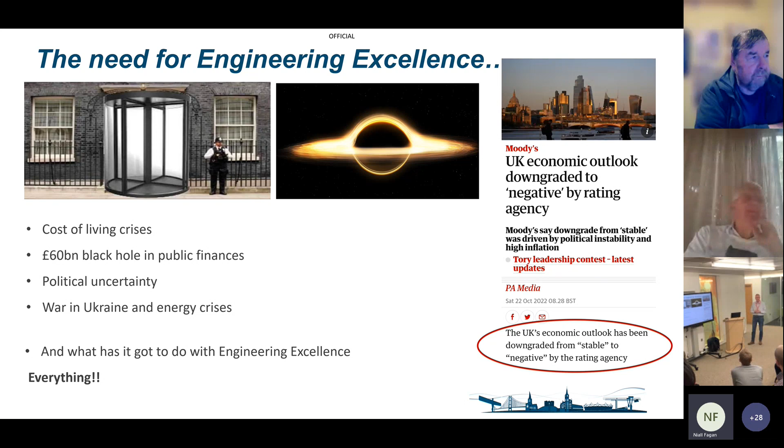So what has that got to do with engineering? Well, I actually think it's got everything to do with engineering. So what can engineers do? For those of you who like Dilbert, I think Rich probably can't see it there, but basically it says that managers are supposed to be dumb and engineers are supposed to be smart. In a nutshell.

So I think what we're here to do is to question, to challenge, to understand, to reason, to produce. As engineers, that's what we should be doing. We should be using engineering principles to challenge practices and engineering standards. And I've got at the end, can you make a career out of following process? Well, unfortunately, yes, because I think we've bred a generation of engineers who tick the box and follow the process. And it's not their fault, because that's how we've beaten it into them over the last 10, 20 years - follow the standard, follow the process. I think whilst we need processes and clearly we need standards, I think how we interact with them should change.

So what I'll cover this evening - I'm going to do a bit about HS2's approach to specification and design. And the key word is approach here.

Potential failure mechanisms of track, because I think that's really important. When you're comparing high-speed rail to conventional rail, failure mechanisms occur, and a lot of them are very similar, if not the same. How we challenge and improve, learning from good practice but also bad practice, failures. That's really important, and that's one of the things I put into practice in High-Speed 2.

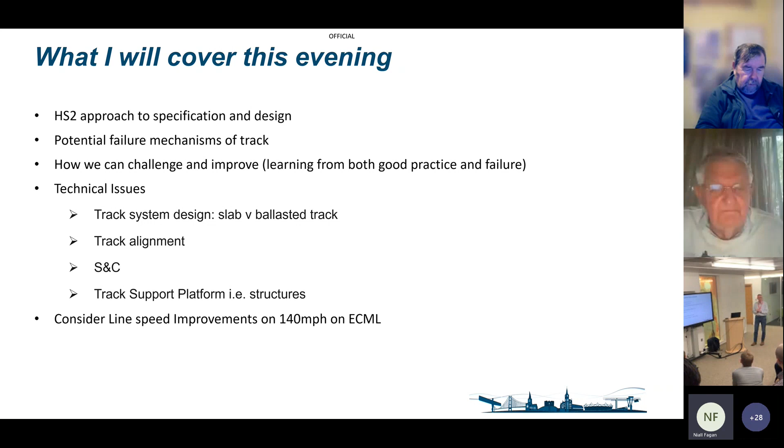Systems design covers rolling stock, track, and support platform. So I'll cover S&C briefly and the track support platform. And I've just added at the end, even though this is my experience in high speed, I got involved in a few workshops recently about 140-mile-an-hour running, potentially on the East Coast Main Line. So this is very relevant, and this may come to somewhere near you soon.

So client-led specification and design. I'm a believer that as a client organization, we've got to lead, okay? And what I mean by that is we've got to take ownership. I think it's really important. Now, I've seen, again, when I was with HS2, we were speaking to a lot of other infrastructure managers.

In Sweden, for example, I got talking to the guys who were in the development stage, and I said, so how are you choosing your track form? They said, we're going to let the contractor decide. Okay, right. And everything was, oh, well, we'll just put it in the contract, the contractor will decide. I personally don't agree with that, because contractors price risk. One of the first things I learned as an engineer, contractors price risk. I think the really clever bit is, as a client, to know what risk you keep yourself and what risk you give away. It's finding that sweet spot between them.

So it's about ownership for me, and in HS2, we did that. Ben mentioned the technical authority. Well, that's what Andrew McNaughton called us. He termed that, and he developed that term for his team in HS2, which was the technical authority, which has since been adopted by Network Rail.

So client organization, what should it do? Just going to take a photo while you're talking. So, own the vision and strategy. I think that's really important.

That's got to, and the risks, so that's really important as a client organization. I don't believe you can just farm them off, because it'll come back to bite you.

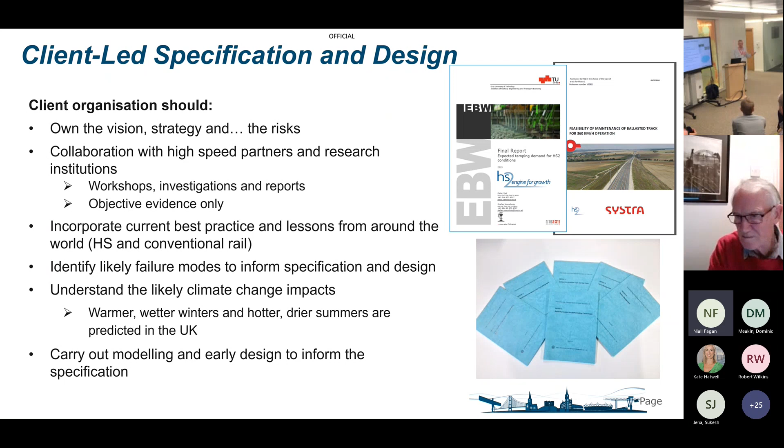And of course, we carried out modeling to inform early design as well, which was really important - specifying for a successful outcome. So in that vein, well, this is easy, isn't it? Just issue technical specifications, the designers design, the constructors construct, and then we put it into operations. Easy, what could be simpler? Well, of course, that's not the case.

We have to - the first thing we need is requirements, an operational strategy and requirements. And I have to say, if anyone's here from the route teams and the sponsors, we are rubbish at requirements. We're absolute rubbish at requirements in Network Rail. And if you, as capital delivery - and I've been on the other side, as Ben said, I was maintenance, and a lot of my career is maintenance, the first half of my career - but we tend to dabble.

I think you might need to mute this. There's a train coming - or no, it's a Hoover.

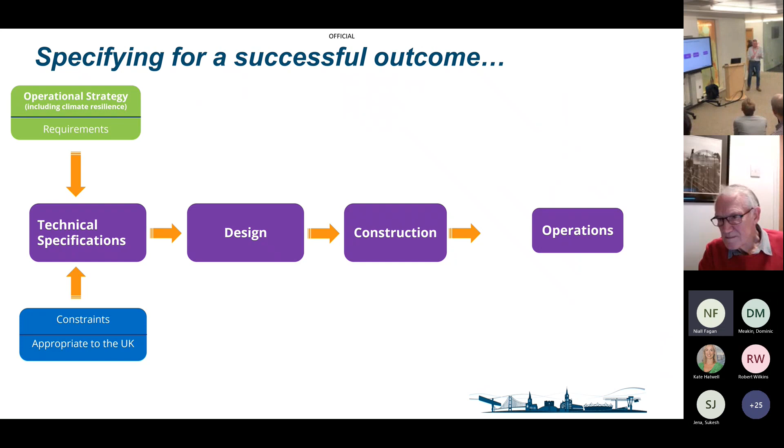So we tend to, I think, the maintainers, the RAM teams, tend to dabble with designs, they sign things off. I think we've really got to focus on requirements. It's really important, so that's the first thing.

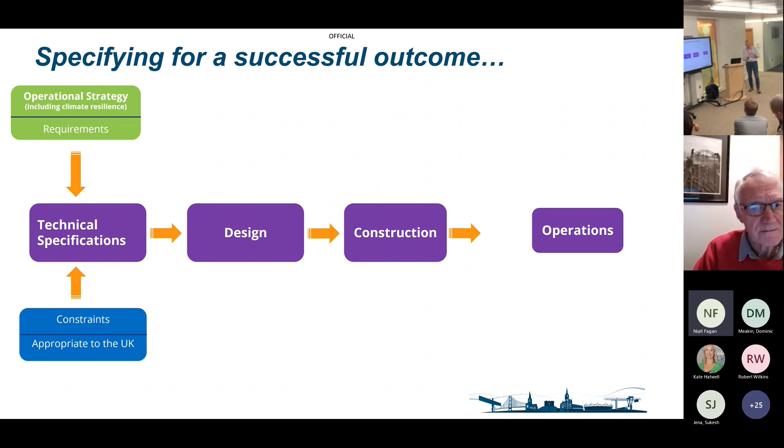And of course, constraints. In terms of building a new railway, High Speed 2 was a new railway, and you've got the UK - I'll go on about track alignment standards afterwards - but ultimately we're a small country. The UK is not a country - England is a small country, because we haven't made it as far as Scotland yet, and I don't think we're going to Wales, but I could be wrong there. But anyway, the point is, it's a very congested, high density country, and therefore the constraints we have to live with are different compared to France, Germany, or Spain, which are generally huge countries in comparison.

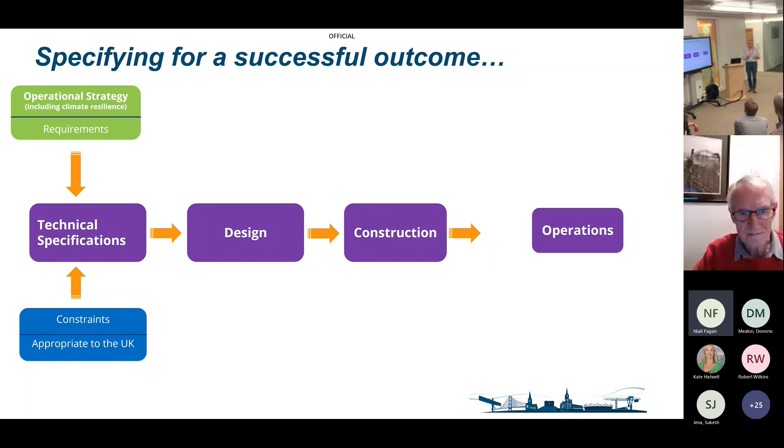So that makes a difference to your standards and specifications. So, as I said, we did a lot of client-led early designs and investigations to inform our specifications.

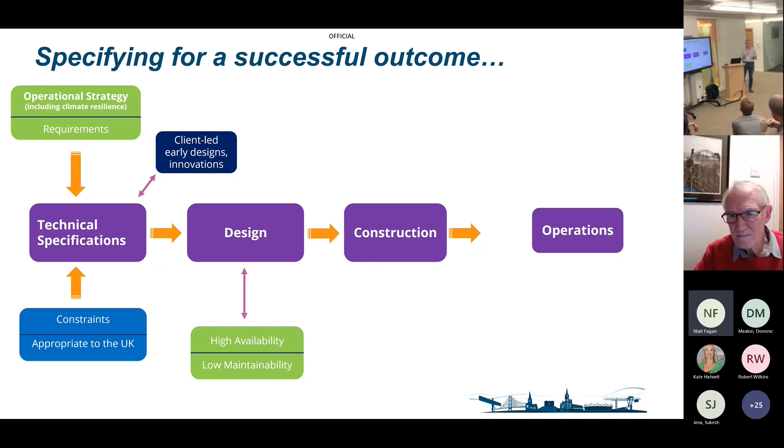So design has to be about high availability as well. Availability means in this context very few possessions for maintenance, but we do need to have some as well. Quality - when we talk about quality, I think most people think about construction quality, but it's also design quality. It's the quality of the design, and I don't mean mistakes per se. It's actually good design versus a compliant design, and again, I'll cover that as well.

And of course, there's the asset management, how we're going to manage it, especially with remote condition monitoring, infrastructure monitoring trains, automated train-borne inspections. It's really important that we think about that during the specification and design stage, as well as the construction. And if we do that, well, then we have a chance of getting into operations. And I'll put a circle there, because reliability is key in a brand new railway.

I have no idea when HS2 is going to open, but when it does, can you imagine if there's a points failure on the first day after taking how many billions? It's just unthinkable. Therefore, reliability will lead to customer satisfaction, and that will improve the reputation, because reputation is hard to build up but very easy to crash.

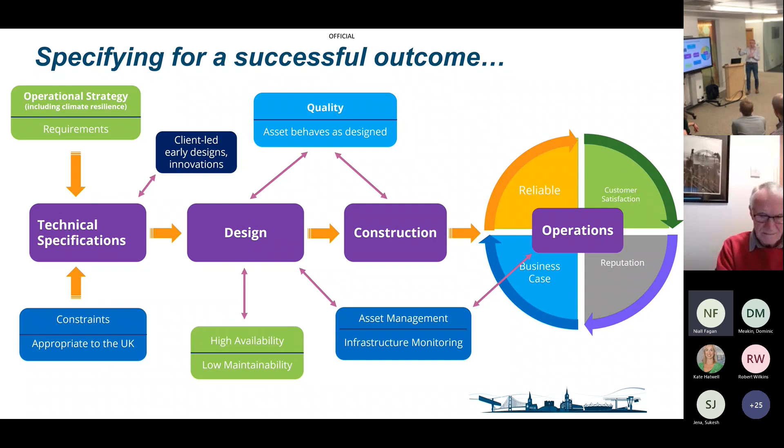That applies to every one of us in this industry, and that leads to the business case. So going back to my comments about risk, this is one of the ways I think as a client organization you manage your risks. Railway is a complex technical system: train, track, support structure, earthworks, vibration control systems.

So there's multiple interfaces. What goes into that? That's where I'll try my thing. So firstly, operating conditions - how many trains per hour is really important. If you've got 2 trains an hour as opposed to 18 trains an hour, there's a big difference in terms of what your infrastructure needs to do.

Speed is important, reliability targets, availability, also loading. Now I've called it internal loading, and what I mean by that is just the physical loading, the train loading on the track, which goes into the structure, for example.

External is climate, for example. We all know hot weather, cold weather - as a track engineer, and certainly in maintenance, you just can't enjoy any time of year because it's likely to catch you out one way or the other. But ultimately, of course, asset behavior is very important, and the deterioration rates, the mechanisms, the rates of deterioration, and constraints, as I said.

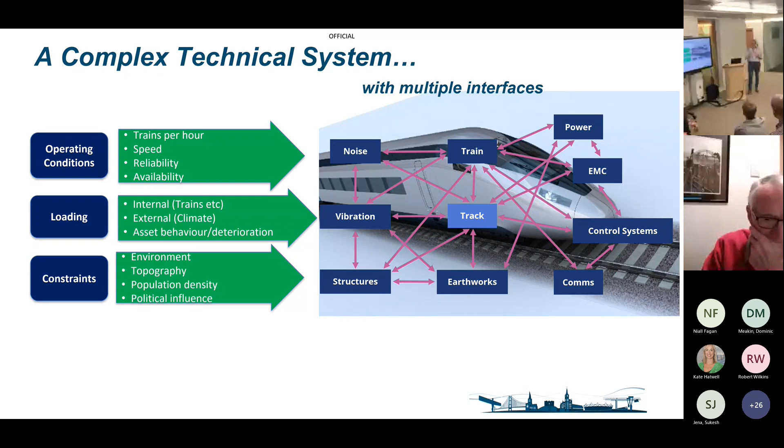So there's the environment, and in the UK, I think from memory, HS2 phase 1 environmental statement was 50,000 pages. Which probably is slight irony in there somewhere in terms of the trees we use, but it's about 50,000 pages. The environmental aspect is very important.

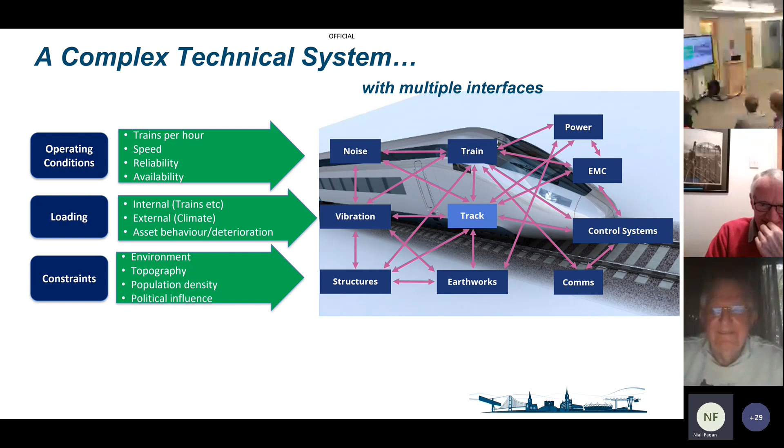Population density, as I said, and of course political influence. There were places - a lot of HS2 is down in cuttings, deep cuttings, and it's nothing to do with the engineering. I'll just leave it at that. There was pressure put on, I think - I can't say this, especially as I'm being recorded, so I won't say anything, won't mention any names.

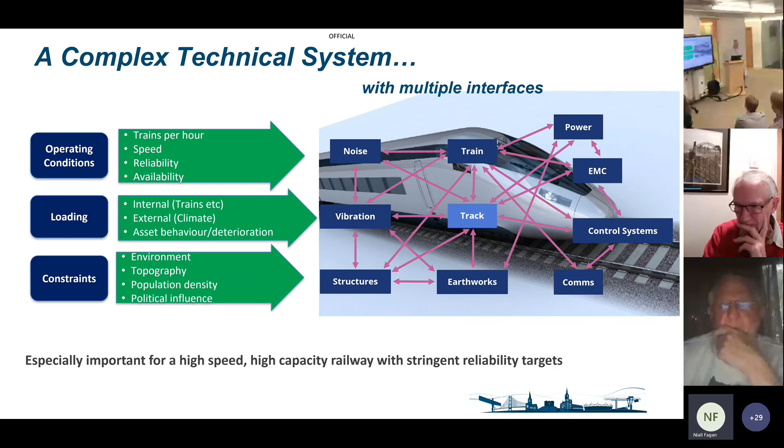And these, of course, are especially important for high-speed, high-capacity railway. But of course, with Network Rail, we know all about high-capacity railways - we run a lot of trains. Right, so I've got on to deterioration mechanisms.

So wheel rail interface - the wheel rail interface is a key aspect of system design. Now, I've referenced Mark Burstow - in the UK, we do certain things well, we don't do certain things well. In fact, there's a lot of things I don't think we do well in terms of railway engineering, but there are also certain things we do very well, and wheel rail interface is one of them.

Mark is an industry recognized expert in this, and Sin Sin is also extremely good at this discipline. So, forces on the track system - I'm not going to read that out, but ultimately, if you remember your O-level physics, energy cannot be created or destroyed, only transferred from one form to the other. I'm sure most of you have heard the analogy - the size of the contact patch between the wheel and the rail is the size of a 5p piece. And therefore, that energy has to go somewhere.

On the diagram there, you can see the various deterioration or failure modes, and it affects the wheel, it affects the rail, it affects the fastenings, affects the sleepers - in some form or other, as I said. And we've got to try and transmit that loading as efficiently as possible into the ground, in effect. And even the ground can be very, very difficult for high-speed trains, because you've got a phenomenon called Rayleigh waves and critical track velocity, which is one of the slides I haven't put in, but I can talk about it if anyone wants. So how do we mitigate that?

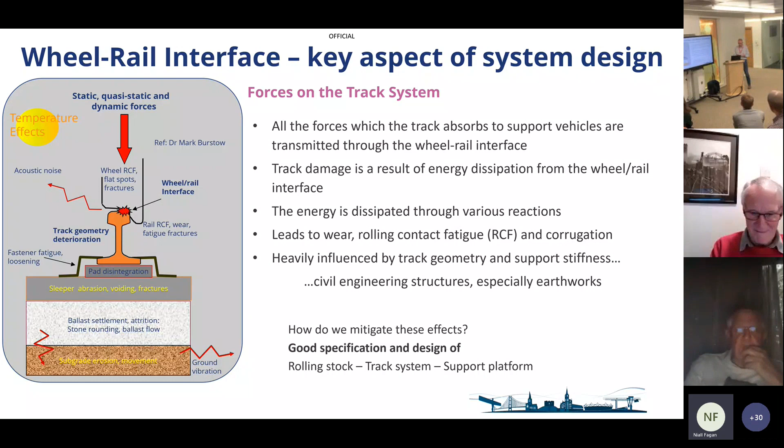So that's just an example of, to us, a 15-year replacement of rolling stock. We've got rolling stock out there that's, well, from how long ago? So deterioration is very important.

This one here is about millimeters matter. So again, the wheel rail interface. And what I've got down in the bottom right there is basically the difference between a P12 and a P8 profile. Now, P12 profiles have been around for quite some time now.

Basically, I remember on the West Coast when I was at HQ, I was working with Mark and Sin Sin, and we were looking at the Pendolinos and some of the issues they had.

We were trying to convince the operators in terms of moving to a P12, and eventually they did, because they saw that it increased the intervals between their wheel turning, which was a benefit to them. It saved them money, so eventually they did.

But now I did this slide for civil engineers. I spent a lot of my 8 years in High Speed 2 trying to explain to non-railway, underlined, civil engineers that millimeters matter. It's really important in railways.

And to be fair to them, because a lot of them, if they're from a highways background or they're not from the railways, they don't quite get that.

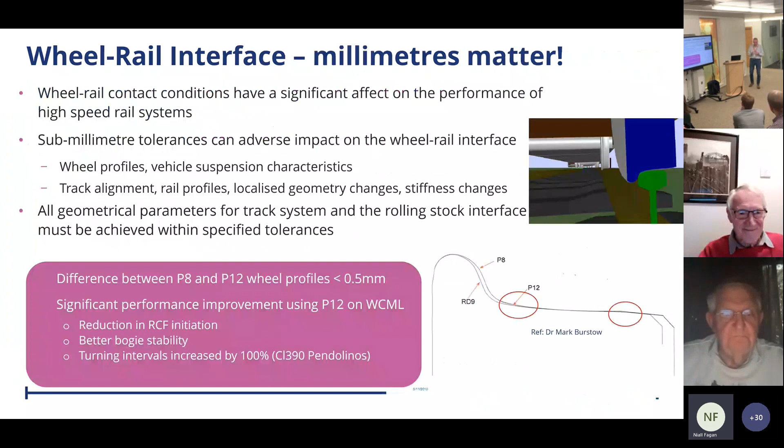So I did this slide and I coined the phrase millimeters matter. And there was a professor called Rod Smith, some of you might have come across, who was a bit of a character, and he really liked this.

But it was really important to try and get across to people that millimeters, sub-millimeters matter. Between a P8 and a P12, it's a sub-millimeter difference. Yeah, it doesn't make a difference in terms of size, but it makes a huge difference in terms of the wheel rail interface. So at high speeds, wheel rail contact conditions have a significant impact on the operations of the system, if you like.

The wheel transfer areas in S&C are particularly sensitive. Now, this is not just high speed. There are significant increases in impact forces through S&C, as you can imagine. And one of the mistakes I think we made, and it's just, I can't believe how dumb we've been, we brought in explosive depth hardening.

Personally, I think that's a nonsense, because there was a crossing in particular near Birmingham, I think it was, and it was banging. It was banging so loud that the maintainer called out Mark and Company, and Sin Sin, I think it was.

And what they found when they measured it with the mini prof was that it was 1 millimeter out of tolerance, 1 millimeter.

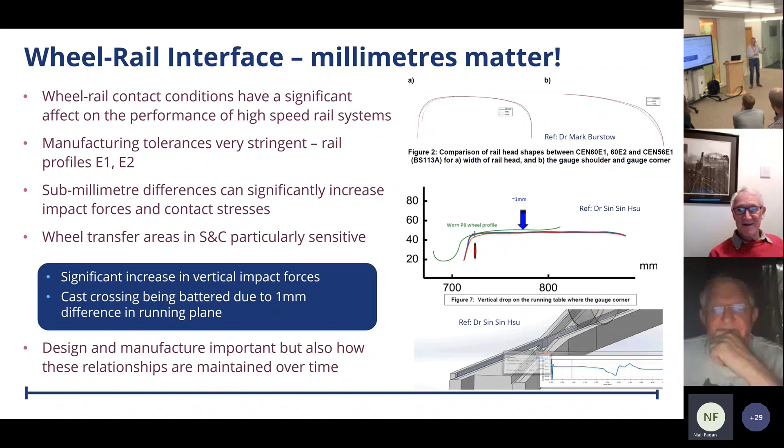But because it was explosive depth hardened, it was bloody difficult. It wouldn't wear in, and they found it very difficult to grind. So that's an example where explosive depth hardening might sound like a good idea - oh, let's make it really hard - without actually thinking about the rest of the system. So millimeters matter.

Now, that's not High Speed 2, that's us now in Network Rail. That's where we are right now. We need to do things more efficiently. We need to do them better because we have less money and we have stringent targets.

The operators are going to say, it's okay Network Rail, if you want to delay us a bit more - that's not going to happen, clearly. So we need to do something.

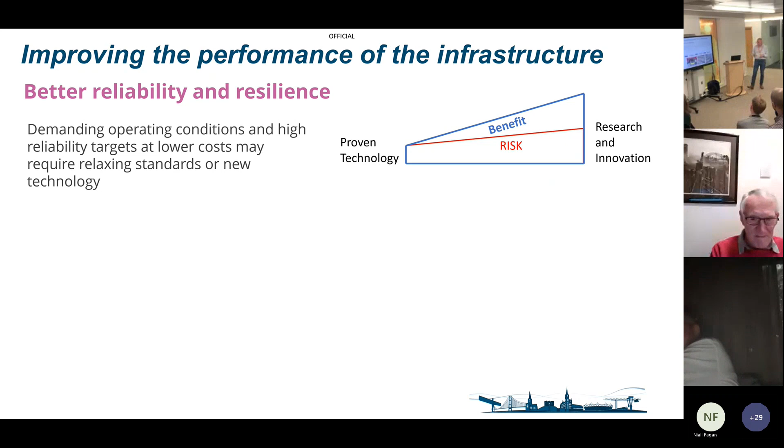So the process is: we have a theory or a model, then we do lab testing, and that's quite important. But it really depends what it is, clearly - the more complex it is or the higher risk it is, the more testing you probably need to do. Fastenings, for example - you've got Pandrol on your shirt there - you must know all about testing of fastenings. There are umpteen standards in terms of testing fastenings before you can introduce something.

In situ trials is the next thing, because we need to trial it, get it in track. And again, another thing we're not good at is trials and trial certificates. We sometimes make it very difficult for suppliers.

Ask any supplier what's the most frustrating thing about Network Rail, and they'll probably give you a long list, but the first thing is always product acceptance. That's because we're not good at managing it - we don't think about what the risks are and how we control them. Instead they say, well, put it in for 5 years, and if it doesn't fail, then we're okay. But that means for 5 years you can't do anything with it. So we've got to be a lot more sharp and focused in terms of the outcomes.

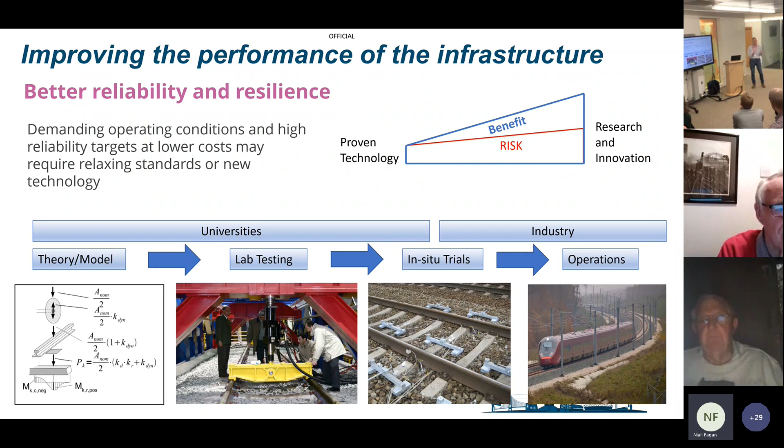Nottingham University is on this patch, and we have Newcastle University. I'm not sure how railway-orientated that is, but we have a lot of railway-orientated universities on our patch.

Leading into that, one of my bugbears is: beware the vagaries of computing or computer modeling. Can we believe everything we're told? Well, I would say not. A quote I've got: our models tell us we can reduce ballast depths, we can reduce transition lengths, we can save millions. Where's your evidence? Oh, my computer - bop bop bop bop - and out pops the answer.

That's nonsense, quite frankly. I've seen it again with some big name consultancies that have done modeling for us. I sat on the steering group for the T1076 RSSB research, which is research into track loading - going back to what I said about track system design. One of the big name consultancies, it doesn't matter who, had on their tender that they would use LS-DYNA, which is a finite element analysis package, to validate Vampire, which is the multi-body simulation package. It can't do it - a finite element analysis package cannot validate a multi-body simulation.

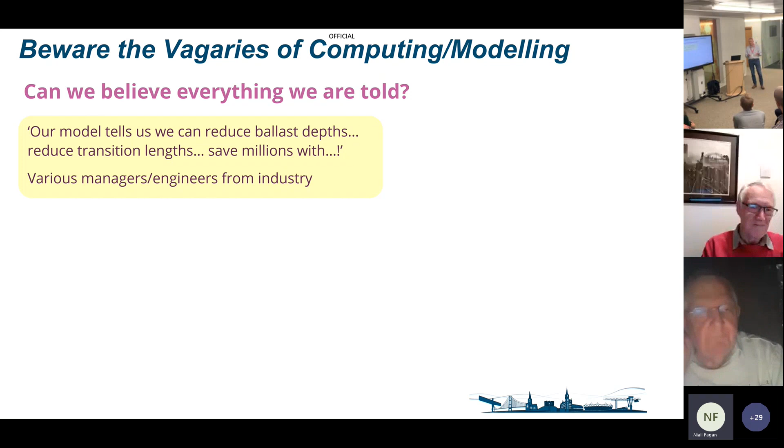It can't do it. I think one of the problems is that computers have gotten so powerful now - anyone with a laptop, or in a company, can download a model or a package and come out with something. And within Network Rail, we've done it in the past.

Now some of the older generation - Richard, you can't see this, but you might recognize it - does anyone recognize that? It's from the Hitchhiker's Guide to the Galaxy. I know the younger generation won't, because this was a brilliant book and a pretty good BBC series, to be fair. That was a supercomputer called Deep Thought - that's what it was called.

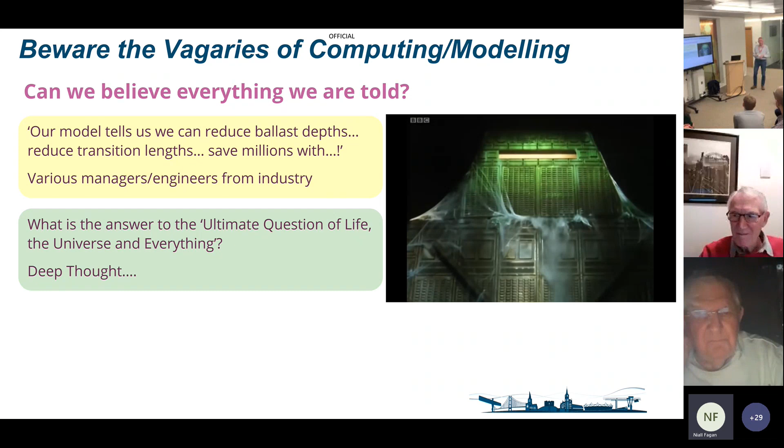They asked it, basically, to find the answer to the ultimate question of life, the universe, and everything. They put it into this supercomputer and it took eons - I think it took thousands of billions of years - and it came out with the answer. Does anyone remember what it was?

42. For those of you in the younger generation, you probably won't get that, but the irony is there - it's absolutely spot on. After billions of years of supercomputing, that's what it got.

So it's just a plea to challenge things. Just because someone has a flashy computer, or a program with nice color graphs, saying something to you doesn't mean it's true.

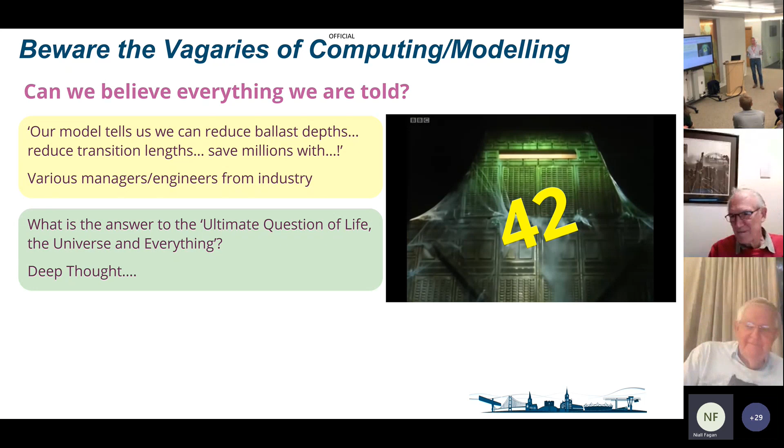With ballast in particular, I'll come back to this later - it's the most inhomogeneous random material, even compared to soil mechanics. Earthworks has more uniformity than ballast. So when people say they can model ballast, now there are ways to do it, but it's not a finite element analysis package which actually creates a mesh. So rant over, or maybe it's not.

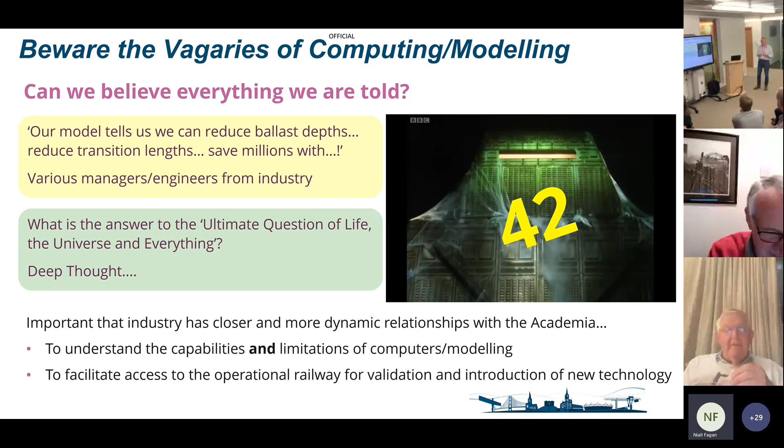It's important, in my view, that's another reason why we need to get close to academia, so we can work with them, because they have a far better understanding of the limitations as well as the capabilities of what their modelling can do.

So high-speed rail, conventional rail, doesn't matter - the laws of physics don't change, unless you're in France. I have noticed that, because the vertical curves are bloody odd, and their bridge designs in HS2 are just unbelievable. But broadly speaking, I think the laws of physics don't change.

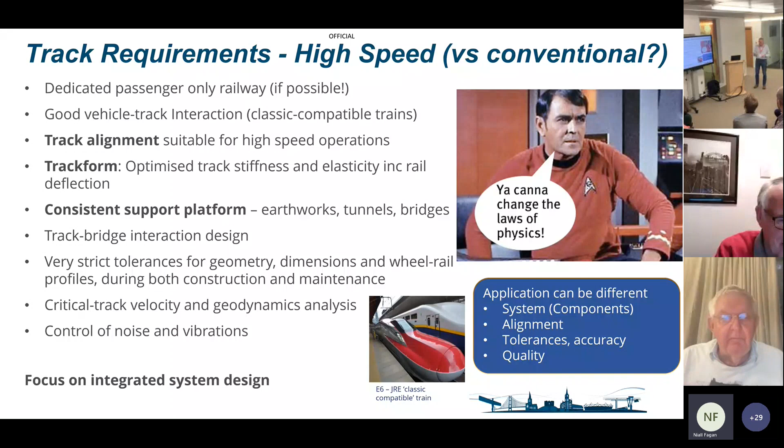For the younger generations, this is the current one, which is Simon Pegg. And the only quote I could find is, "Do they have sandwiches in the future?" Which hasn't got quite the same ring to it.

So anyway, high speed track requirements - high speed versus conventional. In the high speed arena, a dedicated passenger line is better because, as I said, the tolerances are far tighter. I'll come on to that.

Good vehicle track interaction, especially with classic compatible trains, because the first trains are going to be classic compatibles. They're going to run at 360 or 330 kilometers, whatever it is, on High Speed 2, and then trundle off onto the west coast at 125, or whatever that trundling speed is. That's really important, because the HS2 infrastructure and trains will be designed for that infrastructure. They also have to try and design them for network rail infrastructure, which is not easy.

Track alignment, suitable for high speed operations - I'll come back to that. Track form, I'll come back to that as well. Consistent support platform, and what is the track founded on? I love saying to railway civil engineers or structures engineers, the sole purpose of your structure is to support the track - it doesn't have any other role in life. Now, take that with a pinch of salt, but anyway.

Track bridge interaction is another big one - it's really important. Going back to what I said about a small country, there's lots of things to bridge. I think it was on the news, the Colne Valley Viaduct is 3.5 kilometers long, just outside the M25 I think it is, and it's curvy.

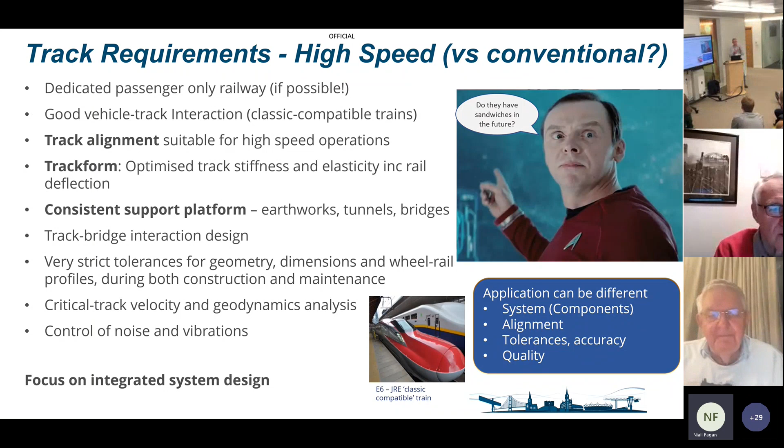Excellent. Right, so the key thing with high speed, well, with new rail, is to focus on an integrated system design. I'm just going to quickly go through this.

In terms of designing your track form, the mechanical behavior of the track is really important. There's higher dynamic loads, as you'd expect, higher vibration levels in the rolling stock and superstructure elements, which leads to fatigue and wear, going back to the deterioration model. Higher stresses on the track bed.

Think 140 miles an hour, because I've seen a report that said we don't think you need to do that with the track bed if you're up to 140. I think you would, actually.

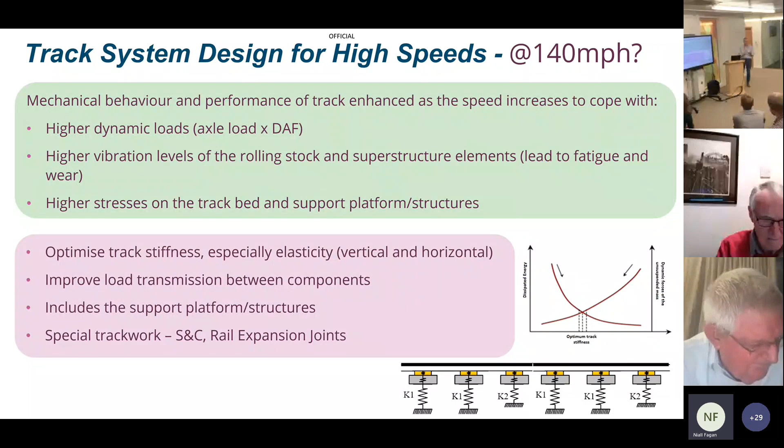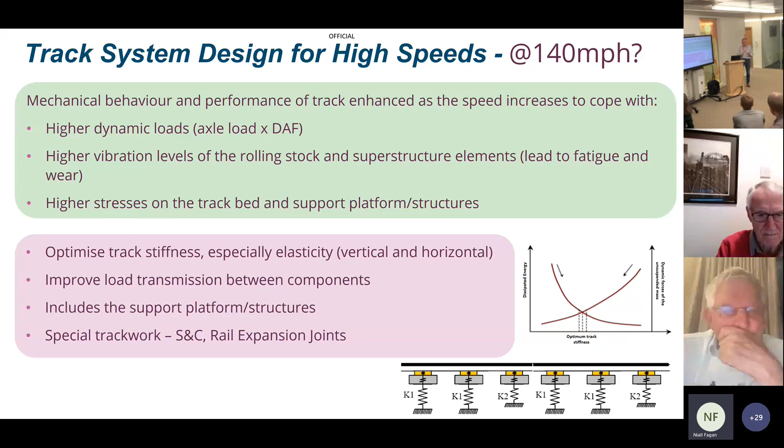It's also about optimizing track stiffness. We do not do track stiffness well in the UK. We just don't do it. We have the values we have, but I don't think we've really defined what our track stiffness is. It's a mishmash, and certain people in the past have even talked about, and I think it was mentioned here by our next speaker, the stiffness of ballast. Well, actually, stiffness of ballast is not specified and is not measured, or shouldn't be. There's no point—it's not about stiffness of ballast, it's actually about the consolidation. Because no matter how stiff or not stiff it is, you don't want it to move once you put your track down or once you put your rails in place.

So, the case study I'm going to use—how long have I got left? Half past? Yes, probably about half an hour.

Okay, half past. Right, so I spent 5 years doing this, and Richard might have been there in the background—a few people, I can't remember if it was Richard or not, but some said you'll never convince McNaughton to go with slab track. The point is, I didn't set out to convince anyone to go slab. We did a lot of analysis, put the evidence together, and it became clear what the answer was. That's the point—it's not about having an opinion, it's about actually developing your data, developing your evidence, and looking. So providing you do it properly, it should actually inform the choice.

What we did was develop an evaluation process, which is quite good, because around the world there tends not to be a track form evaluation process. France and Spain just go with ballast, in Asia they tend to go with slab track, and Germany tends to go with slab track now as well—they tend to go with what they know. But we developed this.

So what we did was get Systra/SNCF to do a statistical analysis of their TGV network. At that point—it's increased since then, this is about 2014, 2015—there were 6 routes. The first one was Paris-Lyon, LN1, and LN6 was the last one, the Paris to Strasbourg line, and that's the line where they broke the world speed record: 574.8 kilometers an hour or something like that.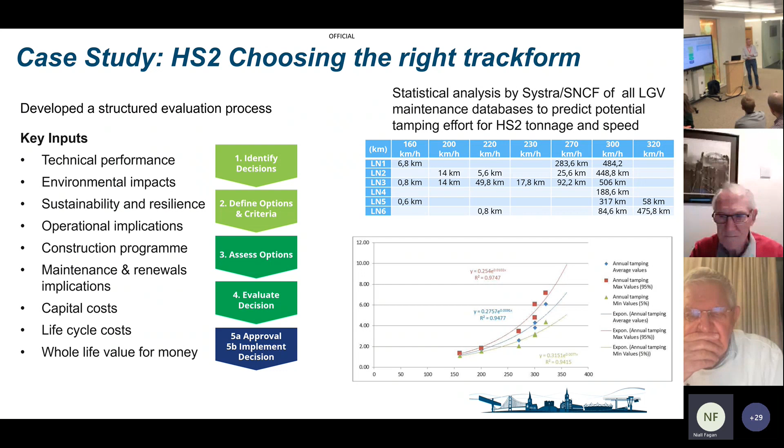So then what we have to look at is how do we optimize the track system. They started looking at undersleeper pads and bitumen asphalt sub-ballast, and I'll come on to that later. But what they didn't have was enough knowledge or evidence of undersleeper pads.

So we went to, as I said earlier, the Technical University of Graz, to Peter Veit, and he did an analysis, because Austria, I think, probably lead the way. In my opinion, Austria and Switzerland probably lead the way in broad terms in terms of track practice. Peter Veit at the university, for 15 years, got a download of all the Austrian railways track quality for the whole route four times a year to do what he wanted. So he had loads of data to play with.

And basically, they now use undersleeper pads with everything. And ultimately, he was able to give us a reduction factor if we were to apply undersleeper pads.

And the other thing was absolute base tamping, the French call it, which in our world is absolute track geometry. So you don't just tamp things, you actually survey, design, and then implement a design tamp. And if you do it like that, on the best day, we basically got it down to we'd still be tamping about 1.5 times a year, the whole route, for that speed and tonnage. That's the key thing, because those graphs, the bottom one is 10 million gross ton, then 20, 30, 40.

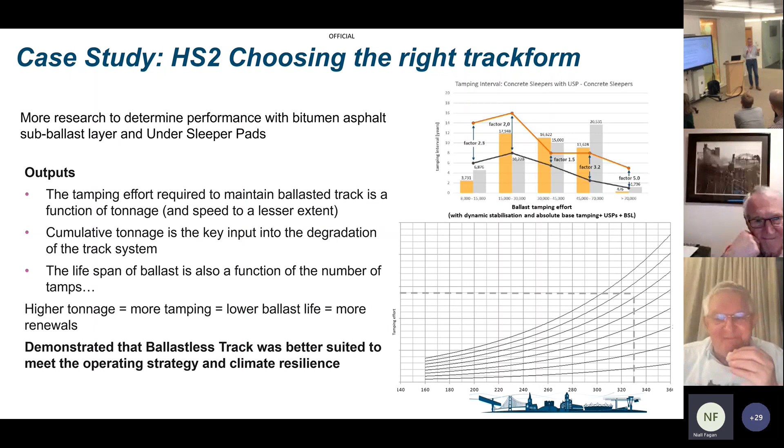With slab track delivered by road, you can go in and do it anywhere. And the guys worked out five kilometer kind of sections and how they would lay the tracks. So the construction played a big part in the decision as well.

So right, I better crack on. Right, a bit about slab track engineer design.

This is really important. If Liam Jackson is on, I apologise, because I was supposed to write the slab track section in 2.02. The draft I saw started off, slab track's good for bridging poor soil. It's not. It's just wrong. It's exactly the opposite. It is not there to do that.

It's based on pavement engineering. Pavement engineering is built up on layered stiffness, and that's why most slab track or track slabs only have reinforcement around the neutral axis. There is an exception to that, and I'll cover that in a bit. But ultimately, BSEN 16432, which is the slab track standard, is based on pavement engineering.

It's the German kind of thing, it was developed at the TUM, Technical University of Munich. And of course the UK, if you remember PACT track, P stands for pavement, because it was laid with a paver. So, like everything, the UK was brilliant initially. Tilting trains, we had the first slab track. We have a lot of legacy of actually being innovative. I would argue we need to get back to that.

So anyway, slab track design, it can be engineered, it can be modelled, controlled stiffness and rail deflection, 60-year plus design life with minimal maintenance. And I remember being challenged - after 60 years you have to renew it, you have to put that into the cost.

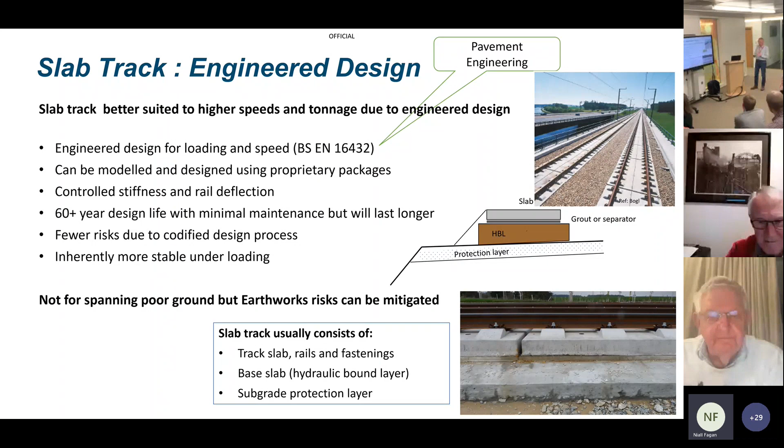Just one thing there. Slab track, by the way, is normally 2 slabs. You have the track slab itself, and you normally have a base slab of some description. So it's not just one; it's usually 2 layers, and it depends on design. It can be more.

So slab track and earthworks. This is one of the biggest risks, especially if you build new earthworks. If you dig deep cuttings and it's in clay, you potentially get heave problems, and heave lasts for a long time, potentially a long time. You will get heave. If it's an embankment, you get settlement.

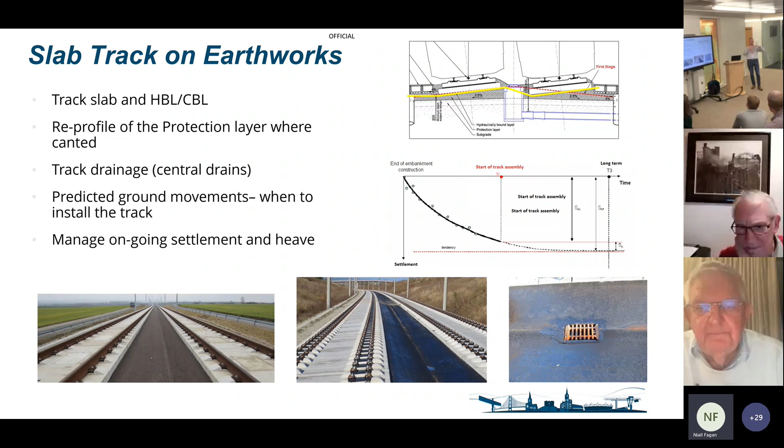Settlement mitigation - now, apologies, but I don't have a plan for fastening on there. They weren't around, and I know John Porrell well, so I would imagine... anyway, one of the original slab track fastenings was the Vossloh 300 system, and the key point with that is it can actually be shimmed. If anyone has ever maintained longitudinal timbers or way beams, it's exactly the same principle.

Hopefully it's a bit more high tech, but basically the same principle. If you have a base plate - I remember being out on site doing a scheme as a tech and putting plywood packings underneath. These aren't plywood, clearly - they're steel plates, but ultimately it's the same principle and it can be done. For heave, one of the things we were looking at, where we know we're going to have heave, we were thinking we will put packings in before. So when we install the tracks, we can take them out over time. But the point is you can adjust rail levels with slab track.

There are other ways as well. You can jack the slabs up, or you can cut them off, jack them up and then regrout them. But in theory, clearly you don't want to do that.

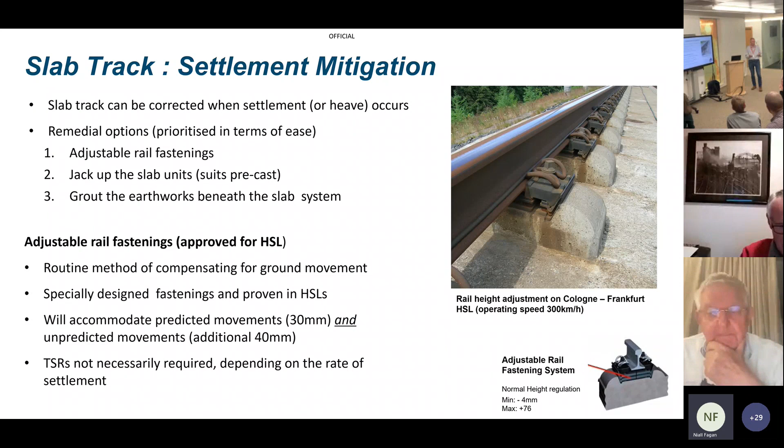Modern earthworks designs - and this leads me to, modern earthworks, I'll put 'modern' because it's the same for new build, but particularly high speed. If you're building a new embankment, it works on a layered stiffness approach, because where you want your stiffness is underneath the track - that's where you want your stiffness. Because the stiffened material is normally more expensive, higher specification - you don't need it down the bottom of a 30-meter embankment. So you tend to have this layered stiffness approach.

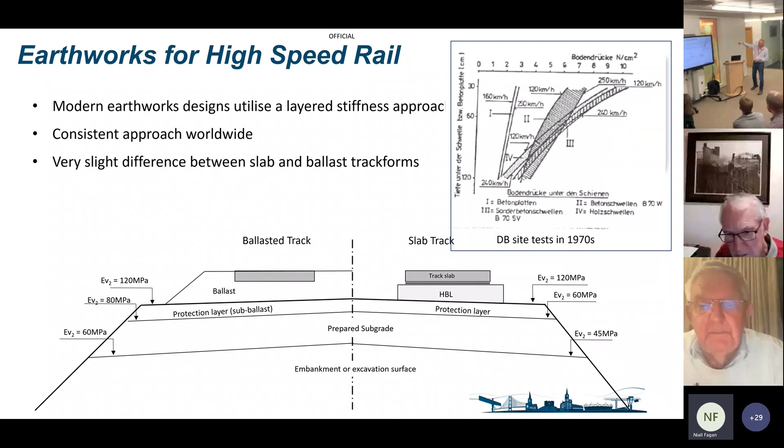If you see the far left where it has I or 1, that is slab track. Along the top is the force or pressure, and that's the depth on the left. You can see slab track doesn't go very far to the right because it transmits the loading in a different way.

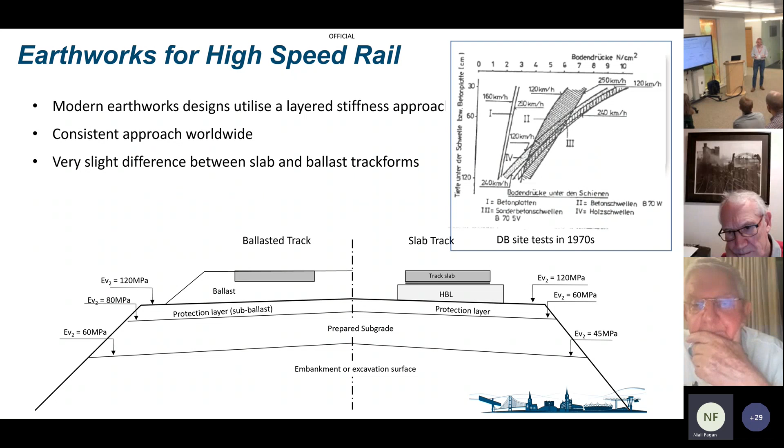Slab track on bridges and viaducts is really important. Bridges move, long bridges move. I made the point earlier on, Hitchin viaduct or Hitchin flyover, which we built maybe 10 years ago now. It's got 3 rail expansion devices on it. I reckon it only needs 1. I think we've done too many. So bridges move, they expand and contract - the longer the length of the deck, the larger the movement.

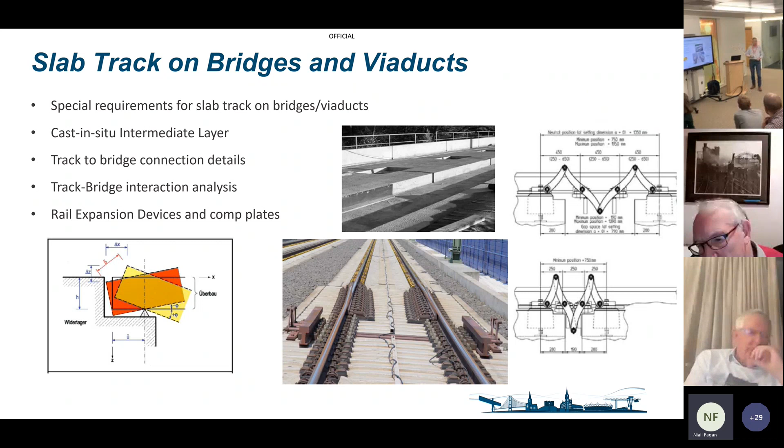That's not new, but what is new is our use of rail expansion devices, sometimes called structural expansion devices. I personally don't like that term, because I think a structural expansion joint is the bridge joint that moves, whereas these things - on the far right you can see where the gap moves, and some of these can be up to 1200 mil. They've got these suspended frames which they put sleepers on, and when they close they can close up like the bottom left, or they can open out - this one has 2 sleepers in effect.

So, track renewals implications. With slab track, one of the benefits is maintenance is more about rail management. If you've done everything right, it should be rail management - you still have to grind it, still have to ultrasonically test it, still have to change the pads as we would, but it's rail management, no tamping, clearly. And for S&C it's the same - if you want to change S&C, you change the ironwork, not the slab itself.

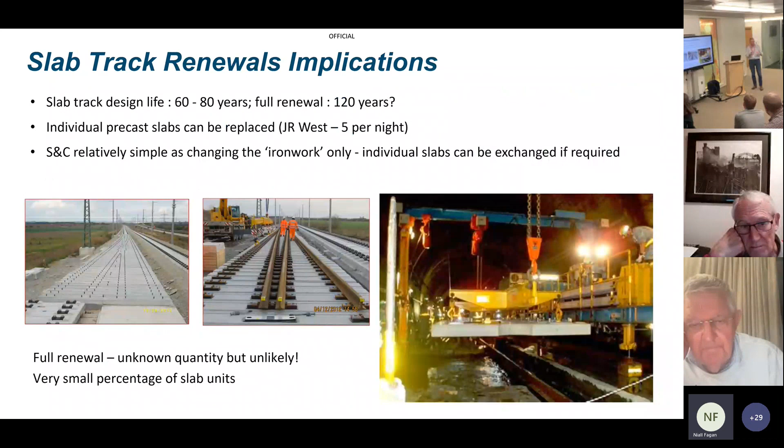I worked with a guy from JR West who was doing a master's at Southampton University, and he told me that in Japan they actually change up to 5 of their slabs per night. You might ask why they change them - this is in a tunnel underneath the sea, so it's basically saline corrosion. But they've got it to a stage where they can change 5 precast slabs a night, which is pretty good. So the point is, you can renew slab track, you can change it.

This is also about safety. I think, down the bottom, my key point is precast slab track is made in factories, which is safer anyway - it's kind of machine installed, very little manual work apart from guiding and tightening up. But the key point at the bottom is: if you have less maintenance, one of the best ways to have a safer environment for our staff is not to have to go out onto the track. So if you don't have to go out onto the track to maintain something, it's inherently safer for our people.

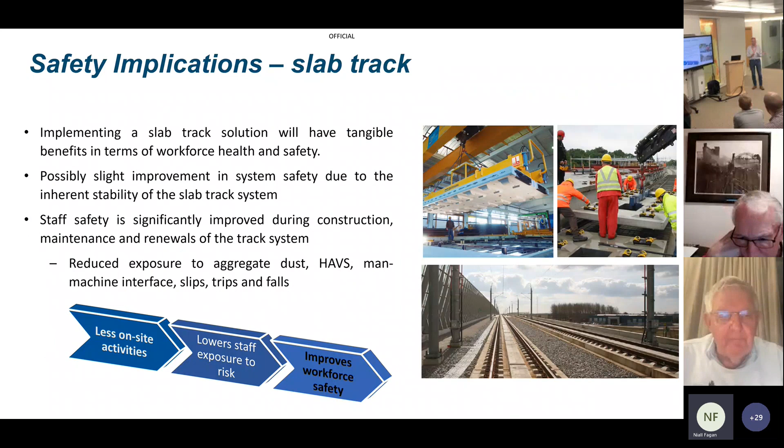This is about the different types of slab track. Since I did this, the one second from right - precast slab, OBB Porr - that's the slab track that was chosen by HS2. And we've just put that OBB slab track into King's Cross remodeling last year, I think it was, or the year before.

We've also got resilient slab tracks in tunnels. The top one is LVT, or Sonneville - we have that in the Canal Tunnel, I think, at St Pancras, for example, so we're already starting to use these. And the bottom one, Sateba, we have on a high-speed line - that's a photograph of it. So we're already starting to use slab track in the UK.

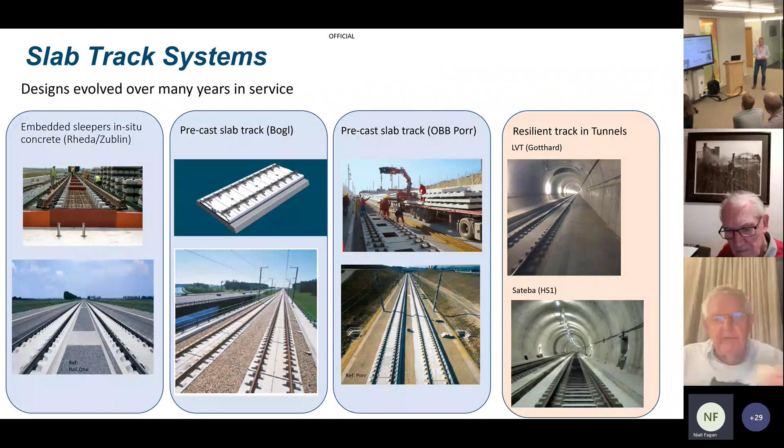But where you have slab track, you also have transitions back onto ballast track, and these potentially are an issue. With these transitions, you have 2 aspects.

There's the elasticity, the difference in stiffness, but there's also plastic settlement. If you have something rigid with earthworks, like run-ons and run-offs to bridges, even with ballasted track, it's similar. You get slacks off the end of bridges because the Victorian earthworks are settling. With design, hopefully we can design that out, but it doesn't always work.

Can I have a show of hands? In terms of stiffness, which is stiffer - slab or ballast? So which is the stiffer track form? Hands up for slab track. Okay, and hands up for ballasted track.

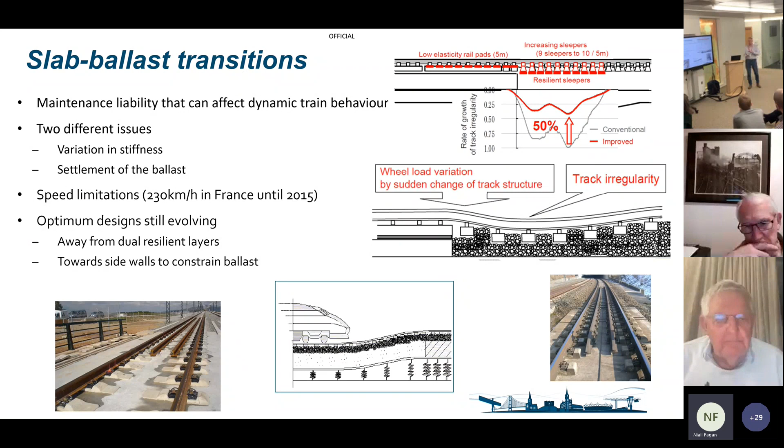Slab track's normal design value is 65 kilonewtons per millimeter, whereas ballast is 80 to 100. Now, our ballast track may not be that stiff, but certainly a brand new high-speed ballast track will be stiffer. So people kind of find it's not intuitive in one way.

So I'm going to go on to ballasted track now. This photograph - I've seen it used in the PWI - is from Austria. The key thing about this ballasted track is that you have the layer underneath the ballast, a sub-ballast layer. And I cracked a joke earlier: anyone who thinks it's a good idea to put sand underneath ballast, leave the room now, please.

We're currently working with SNCF to look at this method of doing unintrusive investigation of the track bed, called Pandascope, and they could not get their heads around that we put sand under the ballast. They just could not get their head around it. So what's the norm by far is some sort of compact granular fill that basically stiffens the subgrade below, because that's generally the point of it - to increase the stiffness.

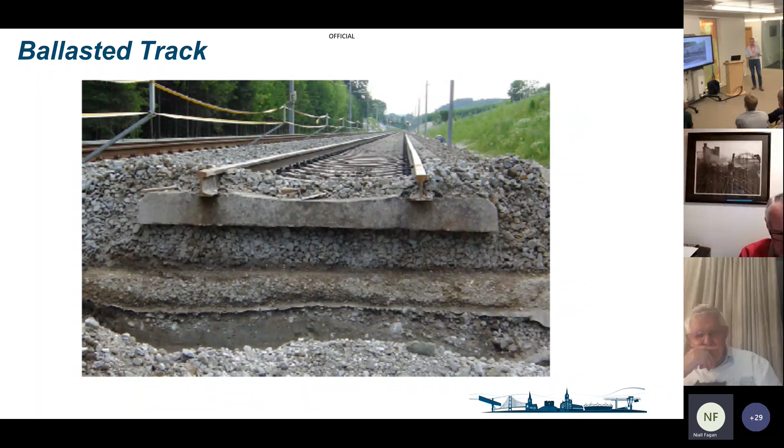So this is ballasted track optimization - now this is my opinion, okay? Rails - we can improve the rails, railhead profile, metallurgy, sleepers, shape, material, behavior under loading, really important.

Dynamic design rather than just - G44s were designed for 30-ton axles, they weren't designed dynamically. We did a lot of work with OBB in Austria, and they said it's very important for a sleeper to narrow in the middle, because if it's straight like an S&C bearer, it's too rigid.

If you've ever seen ballast flow - on high cant track on West Coast, for example - it's not just there, the ballast flows to the low rail. One of the reasons for that potentially is the rigidity of the sleeper is too rigid. So the shape of the sleeper is really important. If you look at old sleepers, you'll see a narrowing in the center.

And of course, you have the width underneath the rail seat, which is where you want it, because that's where you want to spread the load.

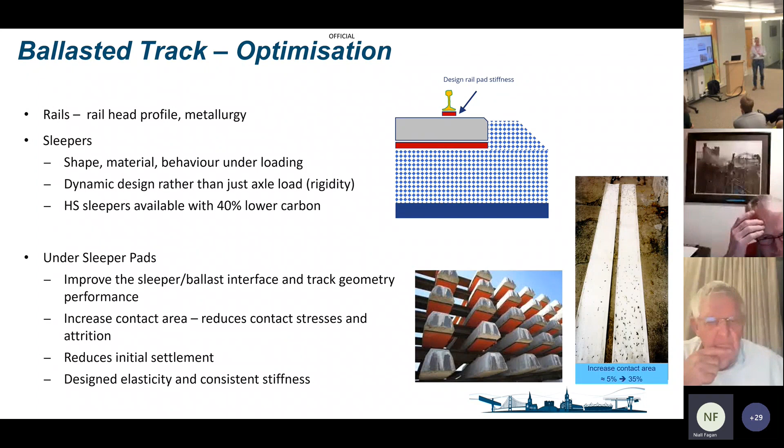Under sleeper pads - these are not new anymore, but they're a really good thing. But with minimum viable product, under sleeper pads is not necessarily something we're going to be able to afford, but it could be. And I would suggest, if we're running 140, that's something we should consider.

Ballast - now I love this. For HS2, given it's the middle of the Six Nations, I love saying this: when we looked at ballast, we found that English ballast isn't hard enough for high-speed rail. I'm not kidding, there's no quarries in England with ballast hard enough for high-speed rail. And HS1, or CTRL as it was, Section 2, had to go to Norway for their ballast.

We were going to - I don't know where, well we're not going to be ballast - but we were looking at Glensanda in Scotland.

So one of the key things about ballast for high speed is the Los Angeles coefficient, which is in effect the hardness of the stone. I remember meeting a guy once from Tarmac Aggregates, and he said something I'll never forget: you cannot change the inherent properties of the stone. So granite is not granite - granite doesn't equal granite equals granite. Granite from over there is different to granite from over there.

You can change mechanical properties of how you break it up and shape it, but the inherent hardness and content of the stone itself you can't change. LA coefficient is quite important. Washed or without fines, which is, I think, what we get.

I've just seen a safety bulletin about ballast and the dust. We don't wash the stuff, it's just what we get out is shocking. I know how they do it.

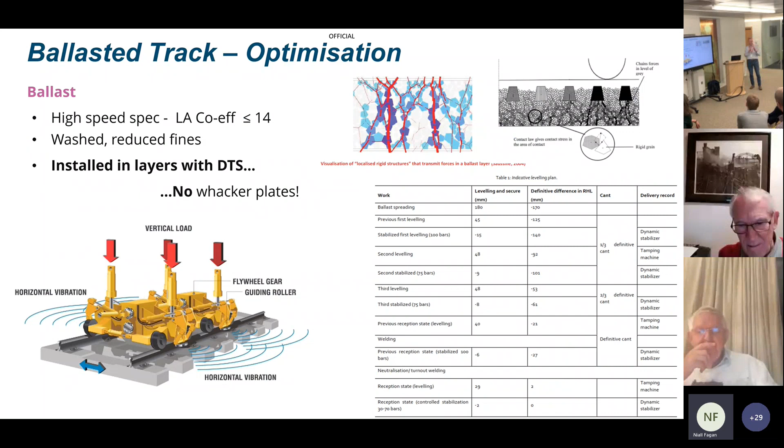So it won't be uniform, and that potentially increases the stresses underneath as well, because stress is force divided by area - if the area is smaller, you increase the stress. Right, I'm looking at the time now.

Sub ballast, bitumen asphalt, brilliant - bitumen asphalt is a fantastic sub ballast. The picture bottom left is from Austria - build a road first, what do you even think about putting a track and build a road? It's uniform, it's got all sorts of advantages, better durability, it's better.

On the right, the top is SDs for LN6, and the right hand one is actually with bitumen asphalt. The bottom two are two lines on LN6, running at 320. The bit between the two vertical bars, marked zone avec GB, means bitumen asphalt, and those bars show the number of tamps - you can see there are fewer tamps when we have bitumen asphalt as a sub ballast.

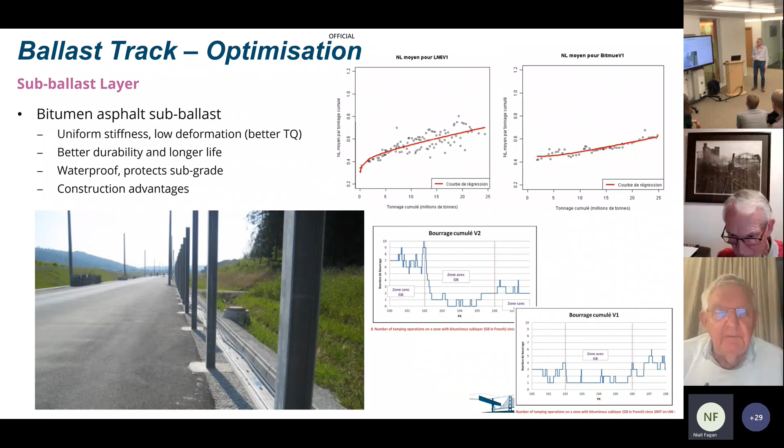It's fantastic. This is a photograph from a friend of mine, Mark Cunningham, who now works for WSP, that he took on the Nîmes to Montpellier line. You can see a number of things going on here - the road, and the sleepers on the right.

What they're doing there is laying the first layer of ballast with a paving machine, and just behind it is a tipper truck tipping ballast. But the key point - those of you who remember expressions like center bound - they've got a groove, can you see the groove in the middle? So when they come to lay the sleepers on the unconsolidated ballast, they're not going to center bind it, they're not going to become center bound.

So they put a groove. There was an old codger called Graham Bernard, who retired a few years ago, who said to me that he reckons the only reason we brought in whacker plates was actually to give a smooth surface before we put the sleepers on, not actually to compact ballast.

So anecdotal, I know. But anyway, the last thing is just to the left of the lorry, you can see the big ballast mountain there as well. So to me, that's a fabulous kind of photograph.

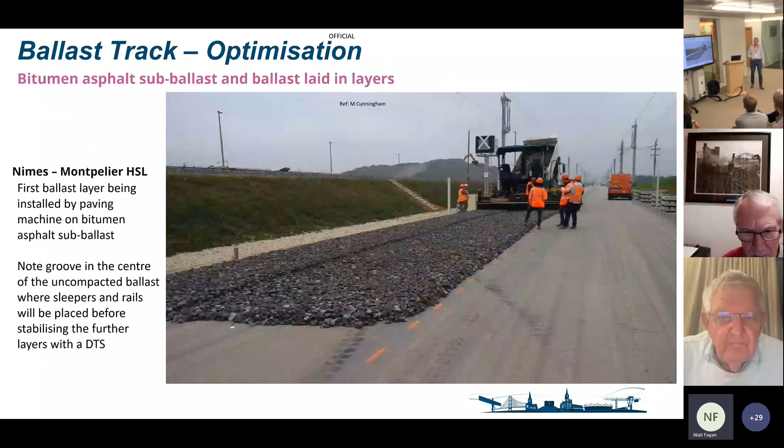And this is my ideal track. I took this photograph, my ideal track for ballasted track. CEN 60 rails, ballast laid in layers with a DTS, sleepers with under sleeper pad. But look at it - down the bottom, you've got the bitumen asphalt sub ballast.

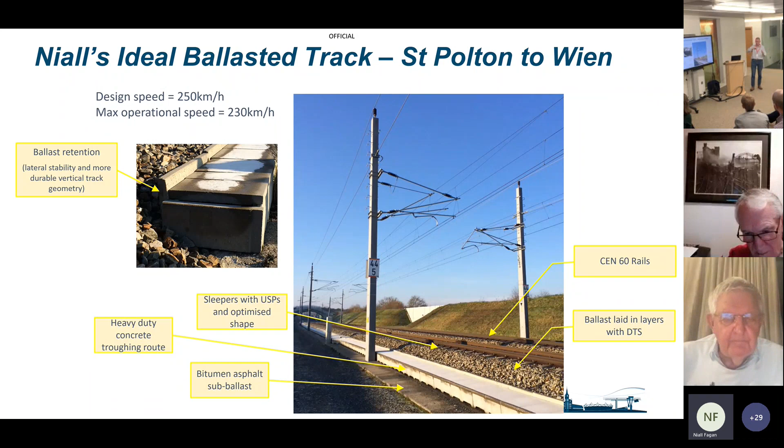And above that, you've actually got this troughing route. If you look at the troughing route, it actually acts as a retaining wall to the ballast, so you've got the lateral stability. But now the University of Southampton research, Track to the Future, Track 21, has actually demonstrated that lateral restraint to ballast will actually reduce vertical settlement as well. It's a key outcome, and that kind of does it.

I know I'm getting close, Ben, so I'm just going to flip past that. Right, track - I'm going to go through this really quickly. Give me another 5 minutes. Right, high-speed track alignment.

The aim of high-speed track alignment should be to basically lead to good vehicle dynamic behavior. In terms of track alignment design, you should always be thinking about what is the train doing, what is it seeing, and therefore you want long, flat geometrical elements, certainly in high speed.

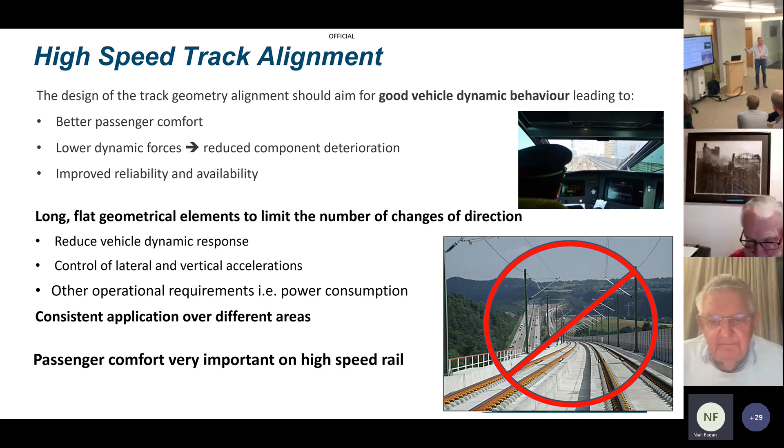The bottom photograph on the right is a view from the Cologne to Frankfurt high-speed line, which is actually 4% gradients, which is phenomenal.

HS2 track alignment design is cognizant of other high-speed standards and the balance between the physical constraints. So optimum design is not found in the TSI, and the ultimate objective is to design a safe, reliable, and efficient railway. Good design is normally a compliant design, but a merely compliant design is not necessarily a good design because of the subjectivity of track alignment.

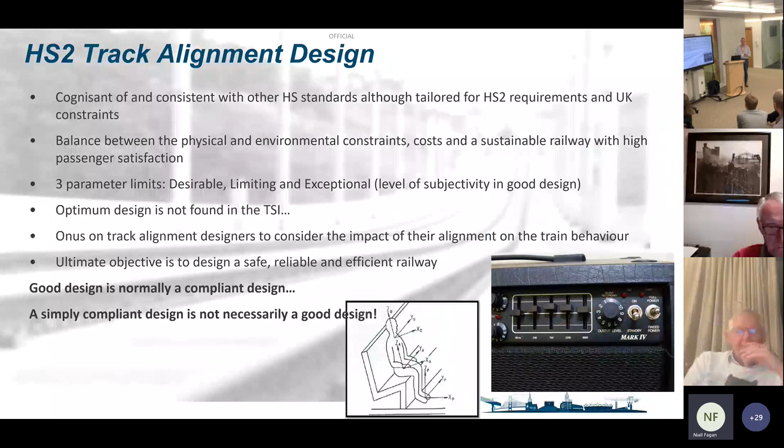Track alignment modeling combined vertical horizontal curves. All I'm going to say on that is that you have to think of both - you must consider what's happening vertically as well as horizontally.

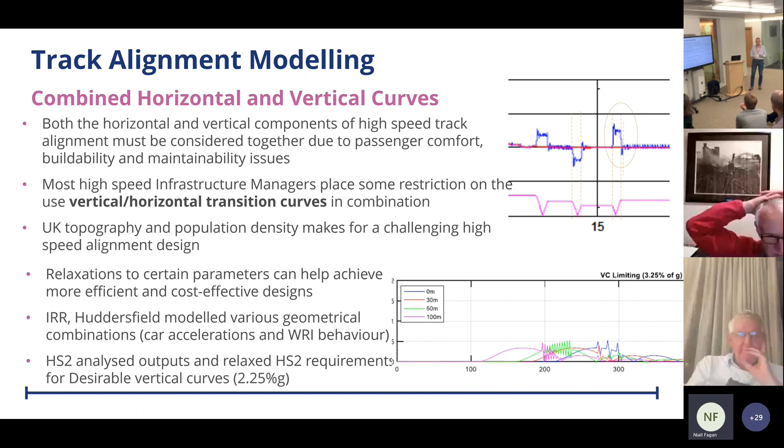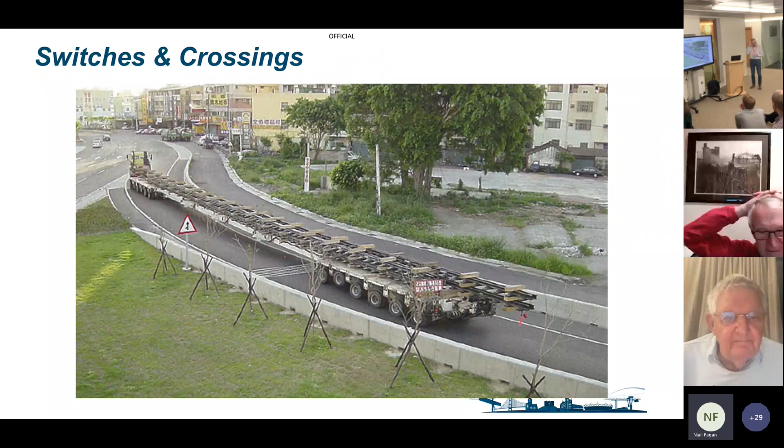Okay, S&C. That's a photograph from Taiwan, I think, and that's only 160 km/h turnout, I think, but being brought to kind of site - they had to take down traffic lights. I think Mike Baxter will remember that.

I know Mike's online. So switches and crossings, high speed, clearly swing nose crossings on straight track. You've got different types of geometries. Intersecting is 113 pounds turnouts, as we know, is intersection geometry.

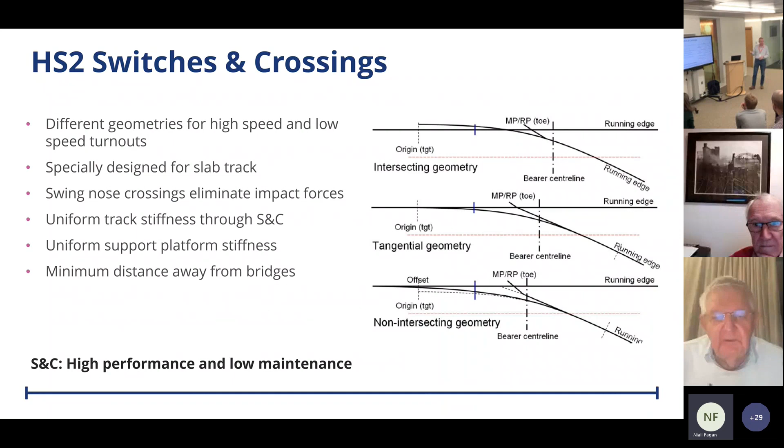When you stand up before you go to a turnout or a divergent route, you'll be thrown over. Tangential is the other one, which is basically kind of in line with the true line. But non-intersecting is basically using the clothoid, and with High Speed 2, we went for the German geometry in terms of clothoid design.

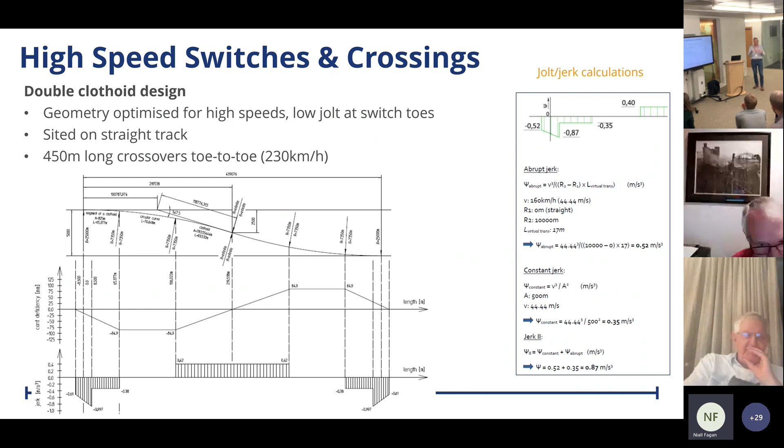Because in plain line track alignment, you always put a transition before a straight into a curve. But in S&C, and I know why we do it in S&C, it saves space in stations. You don't have that, but for high speed, actually it's a good thing to do, and it reduces the jerk or the jolt.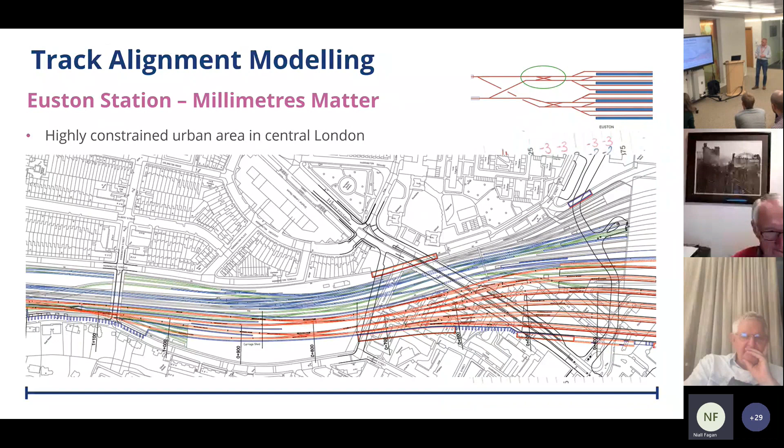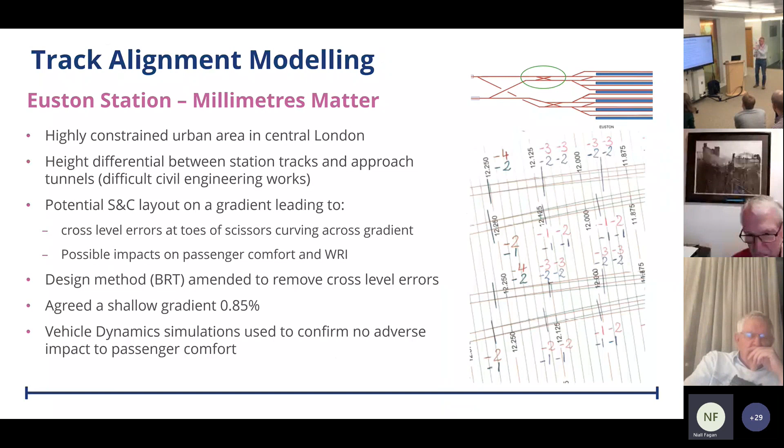So I'm coming to the end, Ben. Just to recap on what we're doing - this whole point, what I've shown is to demonstrate some of the things that we've done in HS2, but it's not about HS2. It's about us as engineers. I think, to me, it's about thinking critically, evaluating, deciding to innovate, engineer, basically.

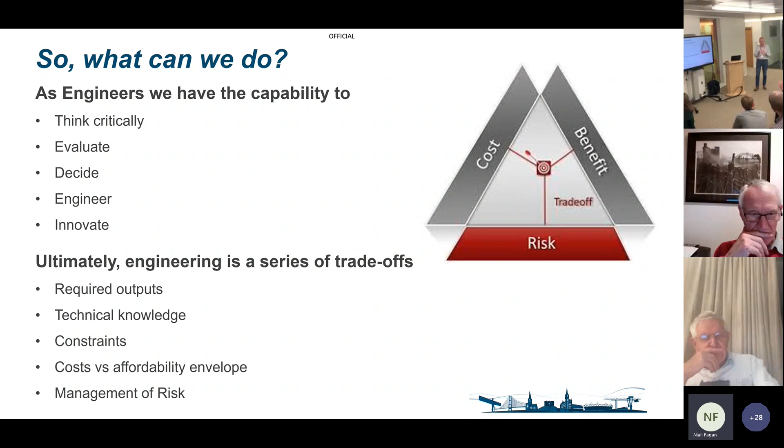Ultimately, engineering is a series of trade-offs. People say, oh, lowest whole life costs - we're not in that world anymore, lowest whole life costs. We should do a whole life cost analysis, but it may well be that a slightly lower or a slightly higher whole life cost for a far lower capital cost now is a suitable outcome.

I'm not going to do that. So I'll end up with Scotty as well. So back to Scotty - we should be challenging standards, understand the engineering principles, know the rationale behind the specific clauses, requirements, and standards. That's the key thing.

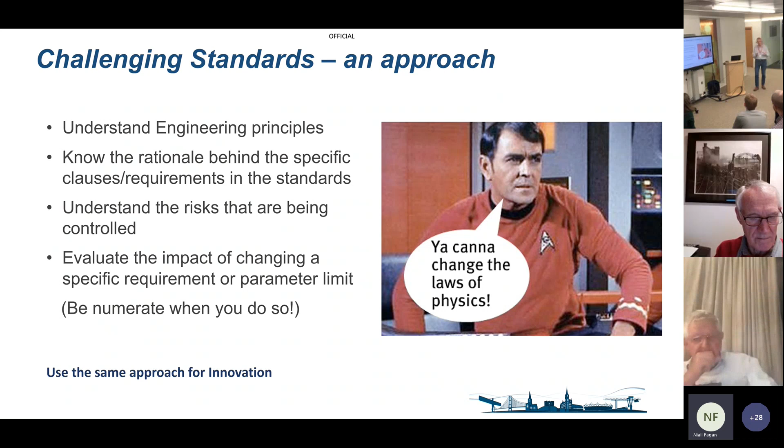If there's a requirement in there, what's it in there for? Why is it in there? Understand the risks that are being controlled, and then you can evaluate the impact of actually changing a specific requirement or parameter limit. Be numerate as well - don't just say, oh, I can't do it or it costs too much. You have to be numerate. Thank you for listening.

On a bit longer. Great, thank you. Questions for Niall?

But you've highlighted throughout the piece that from the engineer is where ingenuity comes from. And yet we have a culture which suppresses that engineering through the way that we manage the railway, certainly in the UK.

Sure, you know, how do we change that so that we can unleash the abilities of engineers? Right. Well, I think the first thing I'd say is we've got to get together as a community of engineers, which is why we had the engineering conference on Eastern Region. It was to form a community, and I think it's to get these things out in the open, because let's be honest, there's a lot of other pressures. So we have design managers in the design office who don't give a monkeys, quite frankly, about what the outcome is. They have a deliverable by a deadline, and they want the design out with the deliverable by a deadline.

That's it. I think we've got to give air cover to people, to more junior engineers. So A is to have a conversation with them. I think we've got to give them air cover, and I've had many, shall we say, robust conversations with project directors or design managers on that basis. I even experienced one particular project director who asked a graduate to do a track alignment design because he knew their track alignment guys wouldn't do it, because he wanted to fit in some sort of civil structure.